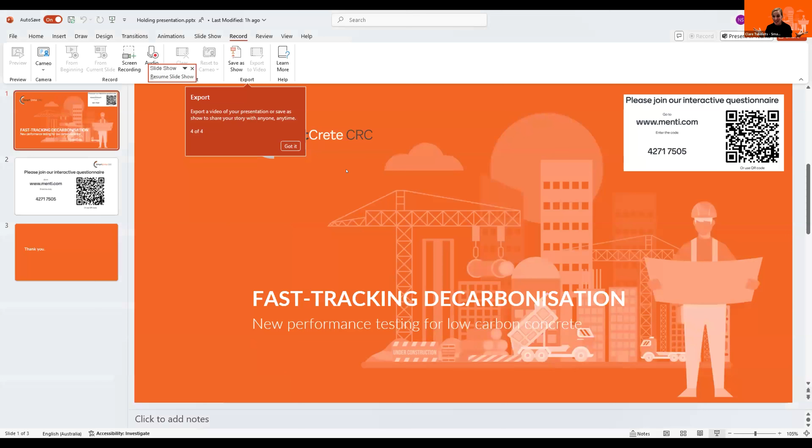Here we are popping everything up in the background. Thank you. Thanks for that, Natalie.

Very pleased to be working with the full concrete supply chain towards pathways to decarbonisation for this sector, leveraging collaboration, innovation, and some really fantastic sectoral engagement.

So today we wanted to have a conversation with you about pathways to new performance testing as a way to really enhance our ability to adopt new low carbon concrete products quickly, but also with a real understanding of the risk and the compliance and really get that real certainty about how these products work. So we've got a fabulous panel for you today to talk about various aspects of this question of performance testing.

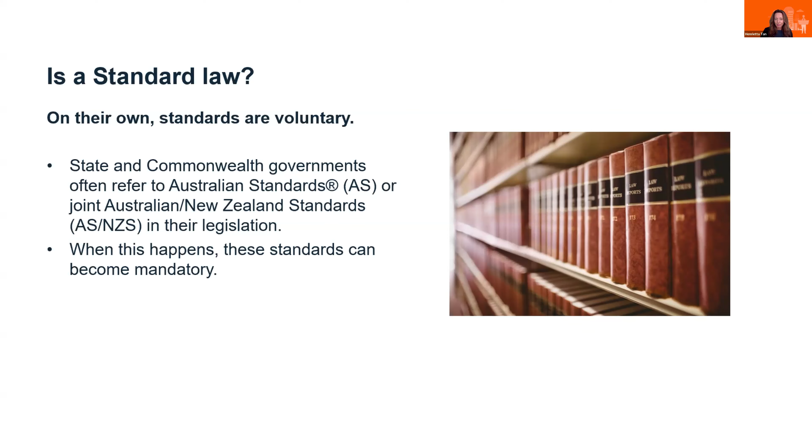I wanted to talk a bit about our proposal process and who can submit proposals to develop new standards or publications or revise them. The short answer is anybody can submit a proposal for new work. It doesn't matter where that comes from. If someone identifies that something needs to happen, then send us a proposal. So we're becoming more active, as you can imagine, particularly in sustainability, and we're really pushing in the decarbonisation space. And that's coming from the industry.

In terms of what we need to look at, we need to look at the problem statement. What are we trying to fix? What are we trying to do? We don't want to develop standards or other publications just for the fun of it. There must be a purpose behind it. And then we need to look at what's the scope of the work? What does that look like? And we'll look at as many of the specifics as we can before we start the work to iron out as many of the problems as we can before we get started.

We'll also look at who's going to do the work. Is it going to be our traditional technical committee? Is it going to be a lower consensus document for one of our speed to market solutions where we might just get individuals to work on that, or a small number of individuals?

And as I said, everything we do is about the net benefit for Australia. So it's also important for us to get support from a wide range of stakeholders. When we send out proposals for public consultation, we want to talk to as many people as possible, whether they think it's a great idea or whether they think it's a terrible idea. Is this going to affect the users adversely? Is this going to have a terrible impact on manufacturers, for example? Are people not going to be able to afford to implement these changes? So it's really important for us that we do actually have conversations with a number of our stakeholders and look at both sides of the coin.

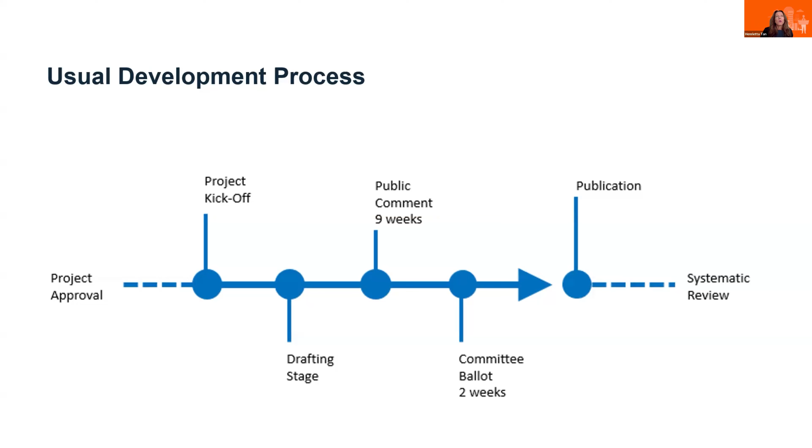But then we have our, dare I say, speed to market solutions. So as I said, anyone can drive the development of a standard, and we've got a number of pathways which aim to speed up some of these solutions. So handbooks and tech specs are a great pathway for getting documents out a bit faster than our traditional Australian standards. Our handbooks are what we call lower consensus, and that means it doesn't need to go through as rigorous a process as an Australian standard.

We've also introduced interim standards, which are much speedier than getting a full standard developed. But it's very important to note that these tend to be for projects where perhaps the idea isn't fully formed. Perhaps we haven't got total agreement on that work. It does allow the market to look at what work's been done in that space and provide their feedback. And the idea of interim standards is that one day that'll become a proper grown-up standard.

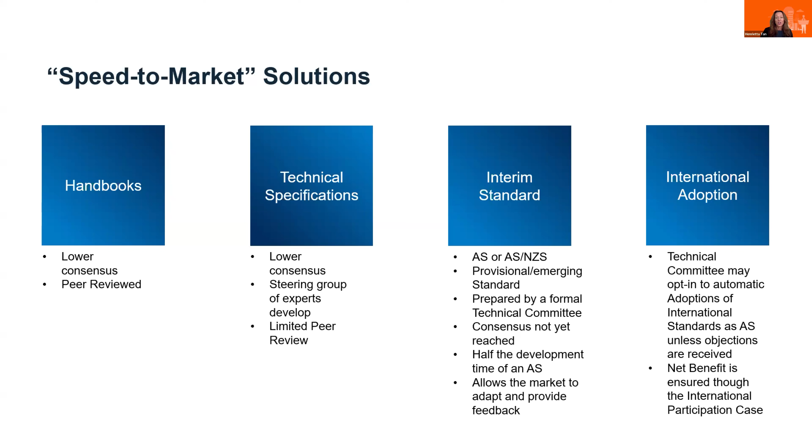We want to speed things up, and we've listened to feedback we've got over the last few years where we need to be faster, we need to be better. And particularly when we're playing, as I say, in this space around wanting to move across the decarbonisation journey, to make things more resilient, to make things more sustainable, we have to be more mindful about just being better and being fast out to market without removing the robustness of what makes our publications so important in the Australian community.

So just worth flagging some of the pieces we've got going on at the moment. They're all in various stages. So as I said, we had the fast track amendment. So that was published quickly for the correct interpretation for the intent of AS 3600 2018 and allowing the community to realise the benefit offered by 600 MPa steels, potentially improving sustainability and construction costs.

We've got the big ones, the AS 3972 general purpose and blended cements, where we're looking at the different types of low carbon cement types being used, and the use of different pozzolans. So that's a very important piece of work.

The AS 3600 concrete structures is also a massive piece of work. None of this is straightforward, but we're all moving along as quickly as we can. So that includes looking at potential inclusion of provisions for geopolymer and alkali activated binder concretes, sustainability, use of waste materials and review of the existing structures.

And then of course we've got AS 1316 masonry cement. Now this one's pending while we look at committee capacity, but this one's around reducing the clinker factor in masonry cements specified in 1316, and to look at the limitations on SCM content and type provided for masonry composite cements. That's all around clause 4.2.

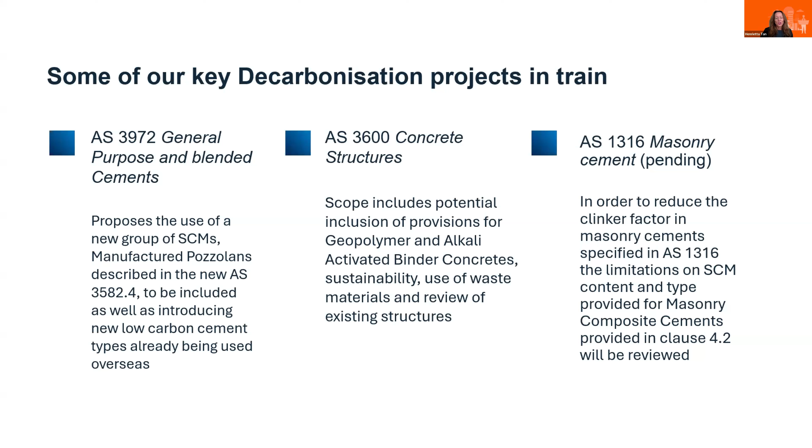As I say, without sacrificing the robustness of what we're doing, because at the end of the day, what we're doing is for the long haul in the Australian community and in the built environment, and we're just looking at the bigger picture. So that's my take on what we've been doing.

I think I have, I stopped sharing? No, there we go. Stop sharing. So hopefully I haven't gone over time. That's us in a nutshell.

Perfect. Thank you so much, Henry. That was a really great overview. I think it beautifully sets the scene in terms of how the evidence that we're creating through these performance tests is then actually used through that whole process of review, and then finally the publishing of standards. So yeah, really appreciate that overview.

Thank you. So we'll move on next to our next speaker to try to bring back those 12 minutes that we lost. I'm really pleased now to introduce Marjorie Valix, who I'm sure is known to many of you on the call. Marjorie is a professor in the School of Chemical and Biomolecular Engineering at the University of Sydney. We're also very pleased that she's leading a number of the projects within the SmartCrete CRC. She provides a lot of great technical expertise and professional advice around testing, research services, the community, government, industries. And so we really felt like she was such a fantastic person to help us have this conversation about the pathway to new performance testing.

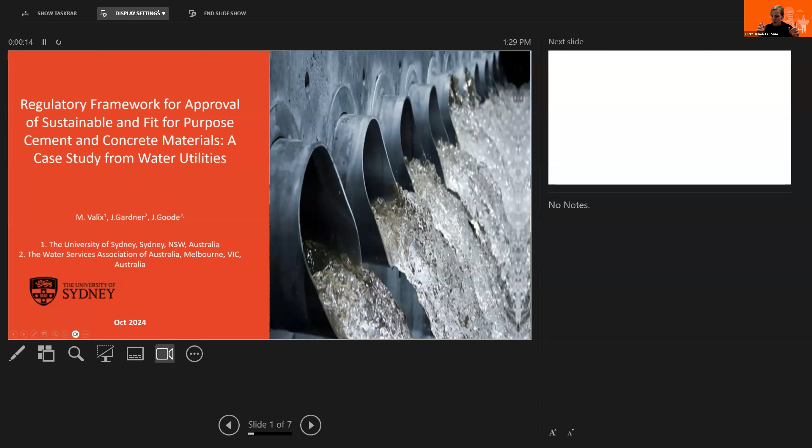Marjorie, before I quickly hand over to you, I can see your presenter screen, not the presentation itself, but over to you, and thanks for joining us. Is that better? Yes, perfect. Thank you. Great. Thanks, Claire.

I'd just like to talk to you a little bit about what we had been doing as a case study from the water utilities in terms of trying to develop a regulatory framework for approval of sustainable and fit-for-purpose cement or concrete materials. So I'd just like to also acknowledge James Gardner and James Goode from the Water Services Association of Australia, who've actually supported us in developing this framework.

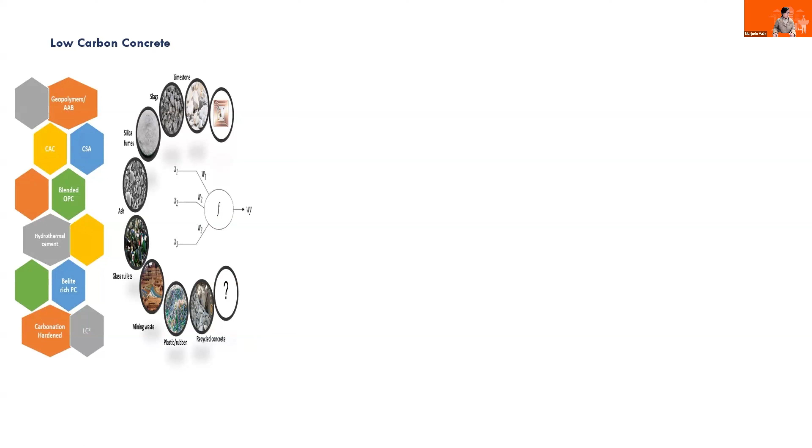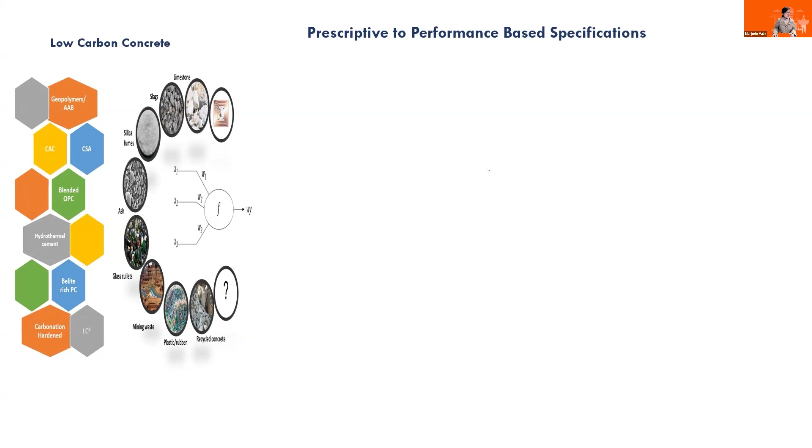The challenge for us, as we already know, is that a low carbon concrete is going to consist of alternative types of cementitious material, including geopolymers, calcium aluminate cement, and also blending OPC with various types of SCM materials, which may include a variety of different types of waste. So the challenge there is then how do we actually approve these materials for use, considering that we don't have much of the performance data associated with these materials. The work that we've been trying to do is really moving away from prescriptive to performance-based specification. So what's needed to actually develop this are various things.

One of the important aspects is the cross-industry collaboration across the value chain. That means taking all the way from the people who actually manufacture the cement and concrete, all the way to the end users, to the applicators, to the pipe manufacturers. And that's really needed because you need to have this knowledge sharing and also to take the risk, and as much as possible to have everyone who's going to be involved in the process sitting at the same table to internalize the risk, so to speak.

The other aspect is trying to define the unique performance that is actually required for this material. And I think this is going to be very specific for the different industries. In particular, I'd like to take this opportunity to show what the requirements are, for example, for the water utilities in their application in sewer and also water. And the other aspect, of course, is the importance of R&D, which is obviously what universities do, essentially trying to tailor low carbon solutions that need to meet the requirements of the industry. The other aspect that's really important is validation. Validation is very important to ensure that the actual performance is achieved. And then finally, of course, is the regulatory framework to make sure that we can actually implement this.

Now, an important aspect of developing a performance-based specification is not only about making sure that it actually performs. The other aspect that is also important is to ensure that we can also capture the embodied carbon, because here we are really trying to develop not just a cementitious material that will perform, but we also need to make sure that it meets the embodied carbon requirements that we're trying to reduce, and also the cost issues.

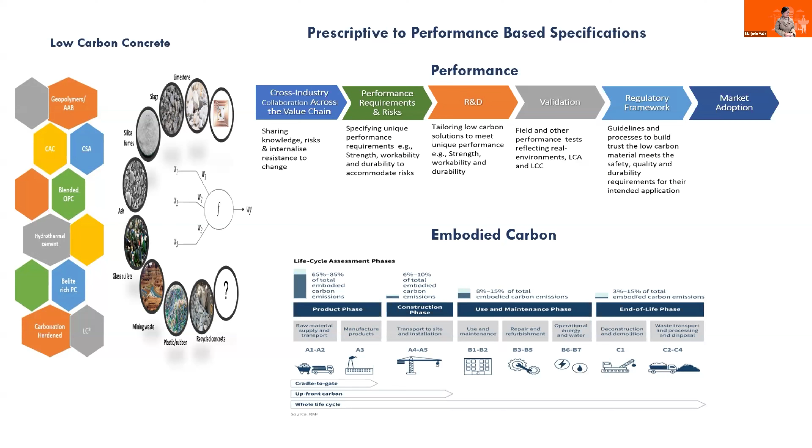We need to recognize the embodied carbon is not just in the material itself, but it also involves the construction of the materials and the subsequent repair and eventually the end of life of that material, how we're actually going to deal with it.

So with that in mind, I'd like to showcase the previous work that we've done, which is funded by the Cooperative Research Center project. And it was titled the Smart Linings for Pipes and Related Infrastructure. Okay, so we did a lot of things here, but one of the important things that we needed to develop is the regulatory framework for approving the materials that would eventually be used for protecting these particular assets.

So we were working really with a series of cementitious materials, all the way from alkali activated materials or geopolymers, all the way to calcium aluminate cement. So the question was, with this range of different types of cementitious material, how do we determine which is suitable, and how do we determine how to select the one that would be appropriate for the application?

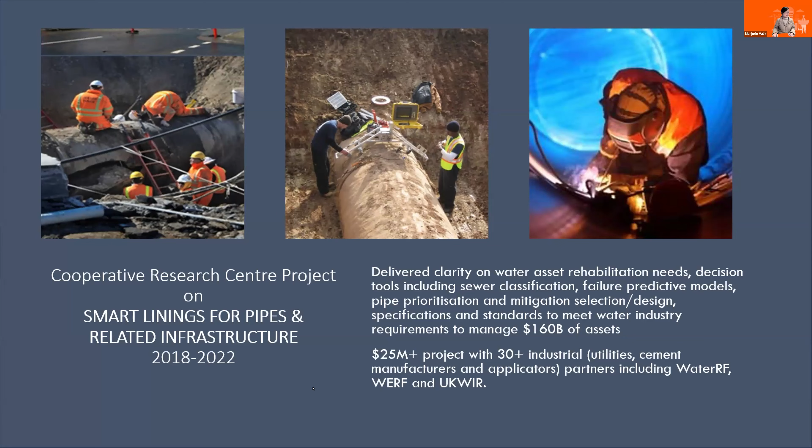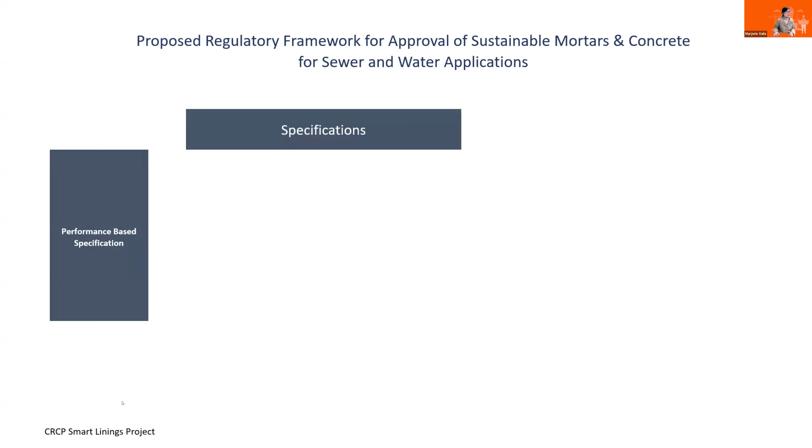So this is essentially the proposed regulatory framework that we've come up with. In terms of the performance-based specification, we think of it as a process where it's really a specification and also the validation aspect. What we've developed there are a series of product specifications, again, referring to the different types of cement materials, very similar, I guess, to prescriptive, but also specifying the requirements that need to be met, including, of course, the codes of practice and the classification of the corrosion risks under which each of these materials are going to be applied.

And that's quite different from how we have specified cement or concrete materials for, say, pipe manufacture in this space, in that we're actually moving away from simply considering the corrosion risks, for example, in sewers, as being highly aggressive, and trying to divide that according to the actual different risk factors. And what that delivered are things like the performance requirements, including test methods and acceptance criteria that would suit this particular corrosion risk.

There's also obviously qualifications and certification for the production facilities and personnel, which we didn't really work with, but we know that it is also part of that specification. So how do we know it works? Well, part of it obviously is validation. Typically the best way to validate is just test it in the field. Often it would be a long-term process, also very expensive. But again, just making sure that it actually reflects the classified corrosion risk.

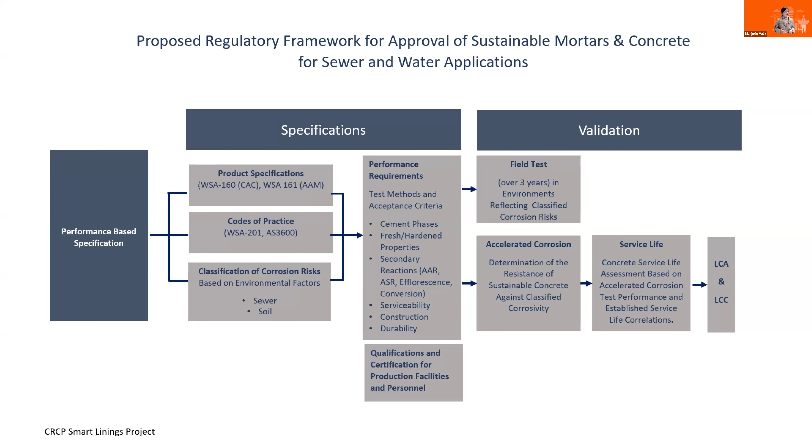The other aspect that we are now in the process of developing and getting approved is the series of accelerated corrosion resistance tests that determine the suitability of the cement or concrete materials against the classified corrosivity. As part of that, we aim to also establish the service life of those materials against those classified corrosivities. And finally, to also include the LCA and LCC, because if we are going to work with low carbon material, we need to make sure that we are delivering a low carbon material, but also understand, for example, the life cycle costs associated with the use of that material.

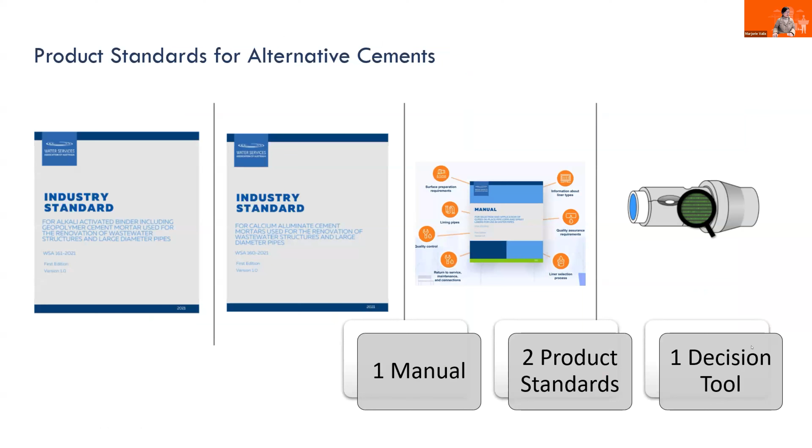So essentially, as part of this program, we've developed two standards, one for alkali activated materials and geopolymers and one for calcium aluminate cement, the codes of practice, and also a decision tool. Now, I'd like to highlight a couple of things that were important in developing this performance-based specification. One is the classification of the corrosion risk. To ensure that we have a fit-for-purpose concrete solution, we really needed to understand the relative risks of corrosion introduced by the different environmental factors, in this particular case, the sewers.

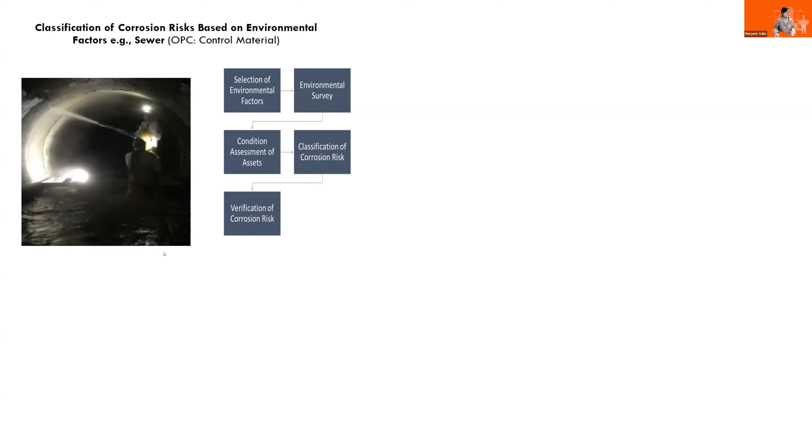So in order to do this, we first selected the environmental factors that we know contribute to the corrosion. We then did a series of environmental surveys, followed by condition assessments of the assets where these environmental factors are present, then the classification of the corrosion risk, and then the verification of the corrosion risk itself. And what we have developed is, this is a simplified version of the different classification risks associated with the different environmental conditions, and also the actual impact on the corrosion of a normal OPC.

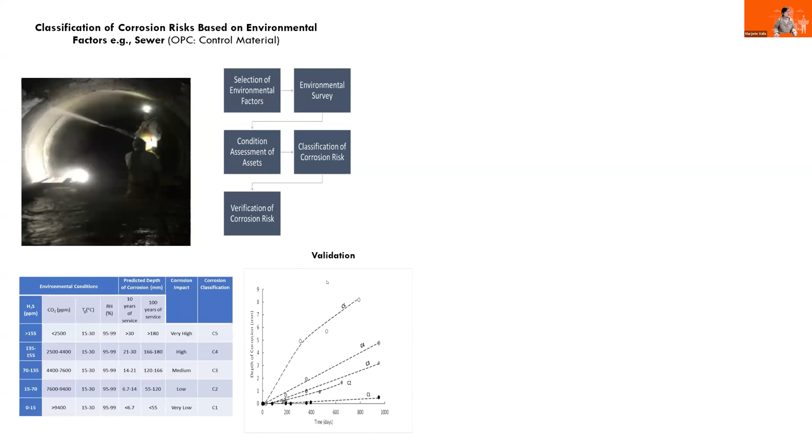And to validate that, what we've done is we then installed a series of alternative cementitious material in this environment, and then we also measured the relative corrosion. And this is an example of one material that we have installed. And so we could see here that we do have different levels of corrosivity or corrosion rates depending on the different aggressiveness, C1 being the least aggressive and C5 being the most aggressive. And essentially that validates that the classification that we've developed for OPC also works for other types of cementitious material.

So on the basis of that classification, what we have then done is try to propose a series of ways of validating the corrosivity of the different mortars. So this is a series of accelerated corrosion tests that essentially mimics the corrosion risk that is available in sewer. So the scope of this test essentially is to assess the durability of the different cementitious material as a function of those environmental conditions that could either be as a result of MICC and also soil corrosivity.

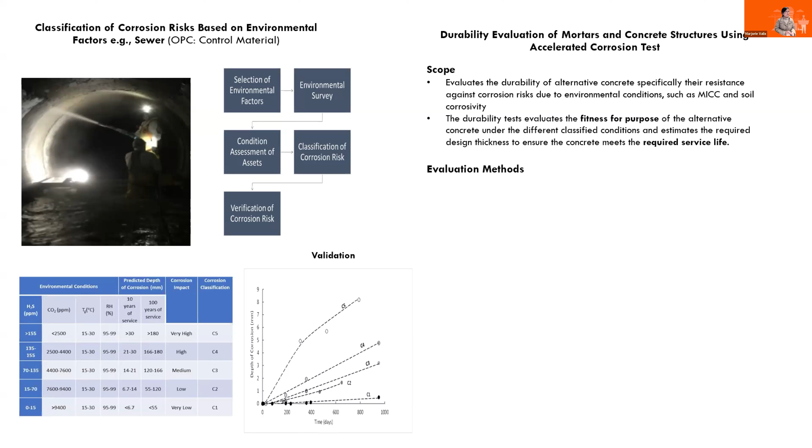The other aspect is that we do want to determine whether the materials themselves are fit for purpose. That means they will survive that environment, but also we wanted to understand the required service life of that material if it was actually applied in that environment. So the evaluation method itself involves essentially subjecting the materials to a series of accelerated corrosion tests that mimics the classification risk conditions.

And then the acceptance criteria for the material is established essentially by comparing the corrosion results for that material against the performance of OPC under a similar accelerated corrosion test, and then calibrating that against the OPC's established long-term performance in the same real environmental condition. Now, because we have lots of data on OPC that has been subjected over the years from, for example, 17 to, let's say, 80 years, we're able to use that to benchmark the behavior of alternative cementitious material compared to OPC, and we therefore use that to evaluate the acceptance of that material.

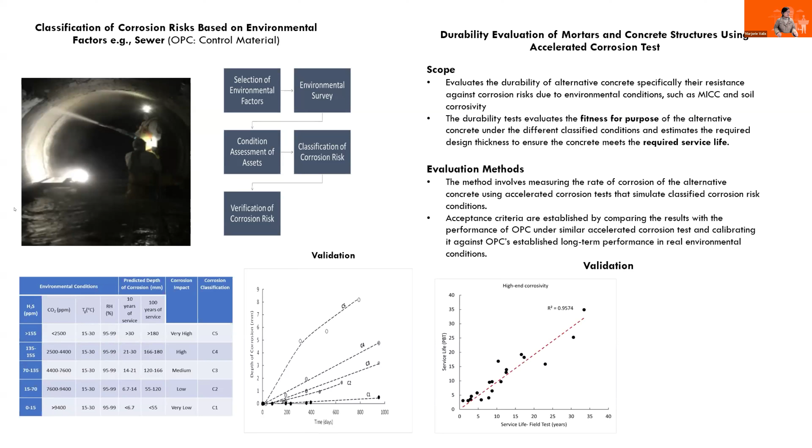So in terms of validation, it shows you, for example, a high-end corrosivity test where we compare the service life of a particular asset or material to the service life we would predict using this accelerated corrosion test. This represents, by the way, different types of cementitious materials, OPCs and different alternative concrete, so I haven't tried to distinguish one from the other. And then this one is more a low corrosivity comparison. So we could see that it's not a perfect fit, but we do have a reasonable fit that shows us that at least the trends are going the right direction.

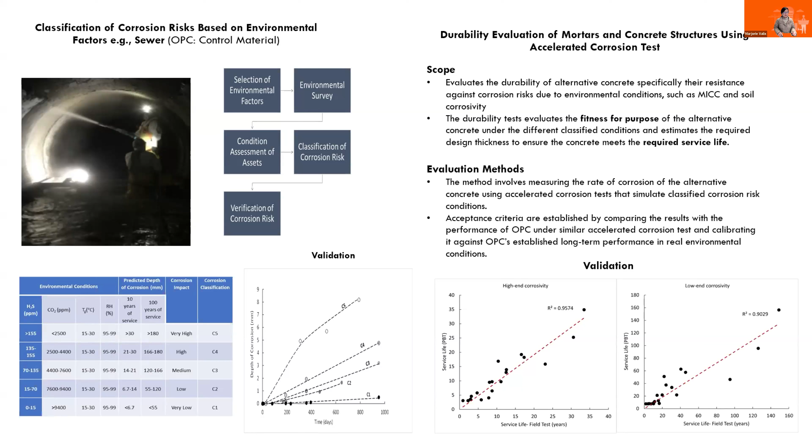Okay, so question is, what's next? So obviously a lot of this work that we've done before is based really on cementitious materials and mortars. And so the next phase is a project that we're undertaking as part of the CRC SmartCrete, which we call Fit for Purpose Concrete. So this is a 4-year project which will examine various types of low carbon cementitious material, also augmented with waste, to try and use it for construction. So the test case will be using it to manufacture access chambers, pavements, and roads, and also as part of cement mine backfill.

And what we're doing is we're partnering again with a range of industries which we know will have involvement in the whole value chain. And the idea again is to ensure that we capture the knowledge sharing, understand the particular risk and concern, and also make sure that we have an early adoption of the products themselves by including the end users, such as the water utilities, the transport and roads industries, and also the mining industries. Okay, thank you.

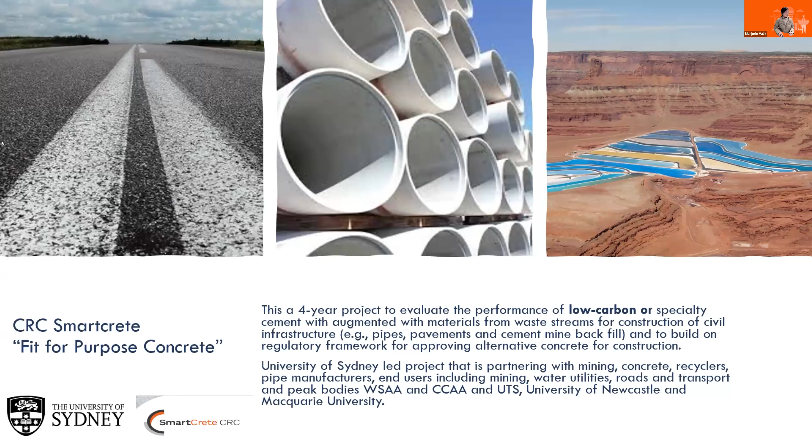Thanks so much for that, Marjorie. It's so fabulous to see that direct example of the development work that you're doing in terms of new performance testing, and then to be able to see how that's being published and shared and promoted in terms of that adoption. So yeah, really pleased to see that, and the work that you're doing in the water industry there. It was fabulous. So our last speaker today is Josh Tapas.

Josh is a materials engineer at GHD, but again, probably well known to many of you on the line. She is also the president of the CIA Next Gen community, so very well known across the concrete sector. She's an experienced materials engineer with experience across material characterization equipment and proficiency in cement and cementitious materials. Josh has very recently finished her PhD working with SmartCrete's very own Professor Vute Sirivivatnanon, and she was focused on alkali silica reaction and major durability issues in Australia. So Josh, thank you so much for joining us today. Happy to. Let me just share my screen.

Is that? Perfect. Does that work? No? Yep, we've got it. Thank you. Is it on a slideshow or? Yep, you're in presentation mode. We can see it. Okay. Great. Thanks, Josh. Okay.

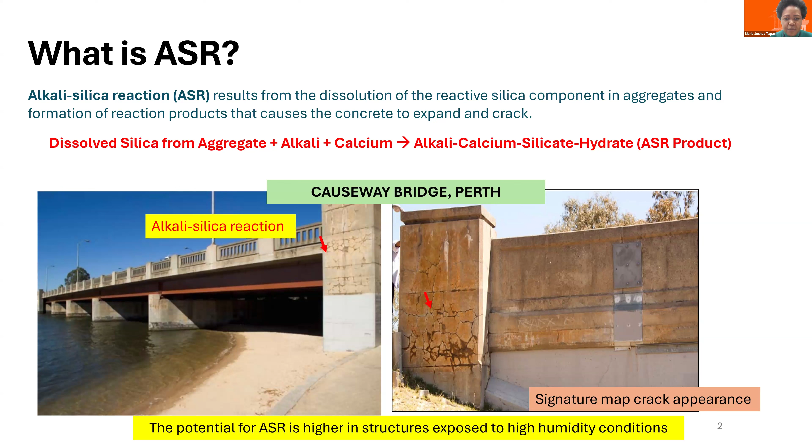Now, this ASR product, once it accumulates, tends to result in concrete cracking. Once concrete cracks, it becomes prone to other deterioration mechanisms as well. ASR preferentially happens in locations very close to water, and therefore susceptible structures are bridges, dams, as well as marine structures. Since ASR is primarily caused by the use of reactive aggregate, the best way to avoid having to deal with ASR in the future is to avoid using reactive aggregate. Then how do we test the susceptibility of the aggregate to alkali silica reaction?

So ASR damage can manifest decades after a structure is built, 20 years or more, right? But we don't have that long to wait. So we have to know before we use the aggregate whether it has a potential for alkali silica reaction. Therefore, we use accelerated test methods to assess the susceptibility of aggregate to alkali silica reaction. As you can see on the screen, we have two in Australia, the accelerated mortar bar test and the concrete prism test.

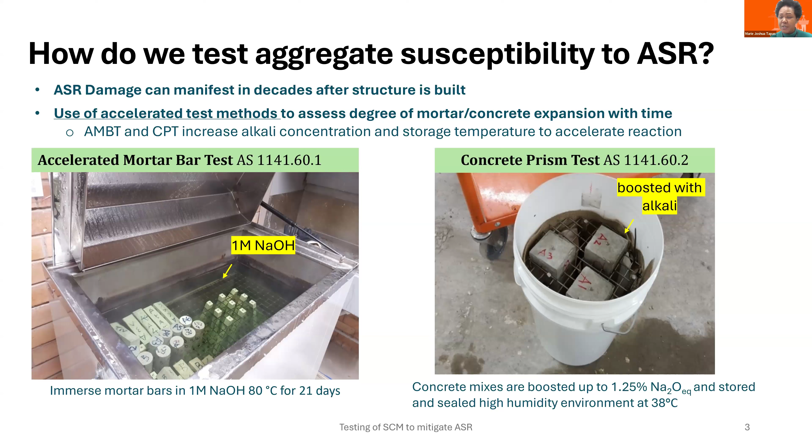Basically, both test methods rely on increasing alkali concentration as well as storage temperature to accelerate the reaction. And then we plot the expansion of the system with respect to time to assess whether we have a reactive aggregate or not. Right? So ideally, we don't use a reactive aggregate, but in cases where we don't have the luxury and we still have to use them in the concrete mix, what do we do then to mitigate?

Now, mitigation of alkali silica reaction involves the use of supplementary cementitious materials. This has been known for a very long time. The question then is, how much SCM do we actually need to mitigate alkali silica reaction? With conventional SCMs, fly ash and slag, which have been around for several decades, we know that we need about 25% fly ash or roughly over 50% slag to mitigate alkali silica reaction. The more reactive the aggregate, though, the higher the dosage of SCM required. And therefore, we still have to test to be sure of the dosage required.

But we already have a lot of documented cases, over 50 years or so, of structures that survive well even with reactive aggregates when we have SCMs in place to mitigate. Now, the plot you see is sample accelerated mortar bar test expansion data. It tests up to 21 days. You can see with increasing levels of SCM in the system, you get a decrease in the expansion. That equates to mitigation, which means SCMs are working well.

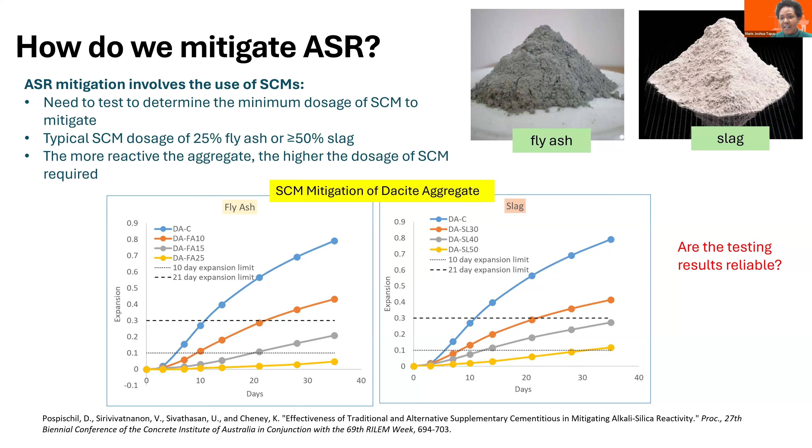You can also see here very clearly that not all SCMs are the same in mitigation. Slag, for example, would require more than fly ash, okay, which is actually good for our low carbon concrete initiative in any case. But the bottom line is not all SCMs are the same. Okay, now the next question perhaps is, how are we sure that the testing results are reliable?

Again, I think Professor Marjorie has already mentioned this in her presentation. The only way, the best way, is really to do a long-term performance test, okay, field data. When we're using accelerated test methods, say you're having a 21-day test result, and you're guaranteeing that your structure will not suffer from ASR for the next 50 years, if your design life is 50 years, for example. Bridges, if you're talking about 100 years.

And basically what you're saying is that, oh, I can test my concrete, my mortar in 21 days, and I guarantee you there's going to be no problem. So the accelerated testing methods really do not mean much without correlation to long-term data. So this paper was published about 2 years ago, where we looked at long-term data over 20 years, actually now over 30 years already from recent updates. Long-term data of ASR concrete samples in the UK and in Canada.

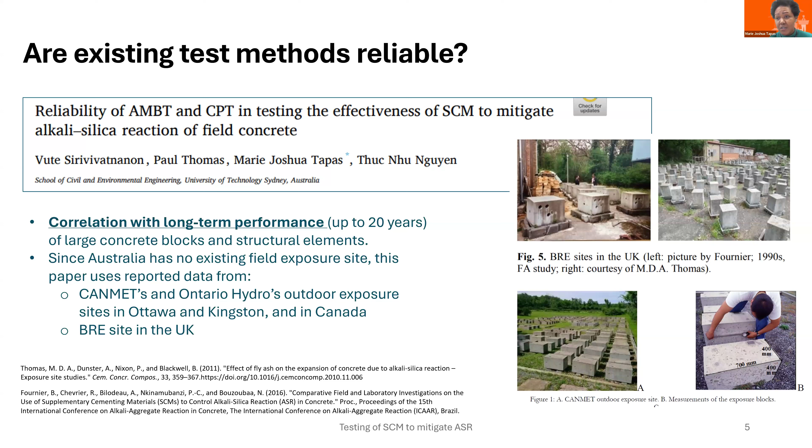Unfortunately, we don't have a field exposure site in Australia. And probably that's because we don't have as bad a case here as what we have in other parts of the world. But nevertheless, this data is very valuable and the only data we could actually use to benchmark. And what we found is that the accelerated test methods actually have very, very good correlation with long-term performance data.

In fact, the Australian test methods with their current test limits are conservative in comparison to the American counterparts. So the Australian test methods are basically exactly the same as international equivalents, except we have much more conservative test limits. And what we found is ours even correlate better. And in fact, AMBT, although heavily criticized as a very aggressive test method, works better in terms of determining the dosage required for long-term mitigation of alkali silica reaction.

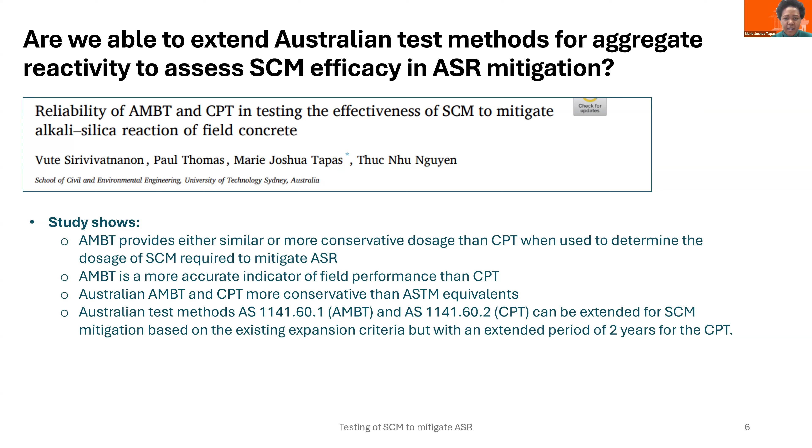I guess now the question then becomes, to me, there's no question we should be able to extend the test methods for aggregate reactivity to assessing the efficacy of SCM mitigation in ASR. Worth mentioning as well, because I'm talking about testing of SCMs, but actually we don't have a dedicated standard at the moment. We use the standard for aggregate susceptibility. So that's in process. I think it has undergone several reviews in the last few years. Hopefully it should get approved soon. So that paper was actually written to support the extension of the existing test methods for SCM mitigation.

So the next question then comes, would the test methods work to test other types of low carbon binders? I think we've already come a long way forward. The new generation of SCMs is, I think, inevitable, because moving to the low carbon space, net zero by 2050, we know that the SCMs we're using, fly ash and slag, are byproducts of industries that may not be present or with processing that may change in the future. Slag comes from steel. We're moving towards green steel. We may not have access to the same slag chemistry in the future.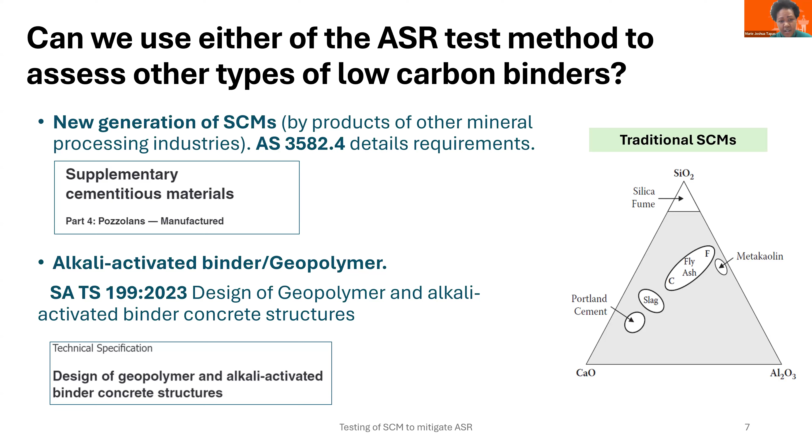Now, geopolymers have a very, very complex chemistry. Definitely, this is a very good move towards performance-based specifications, because with geopolymers you can make different SCM combinations, different types of activators, different alkali concentrations, so it's almost impossible to capture it in a prescriptive form of a standard. So I think we've made a good move on this one.

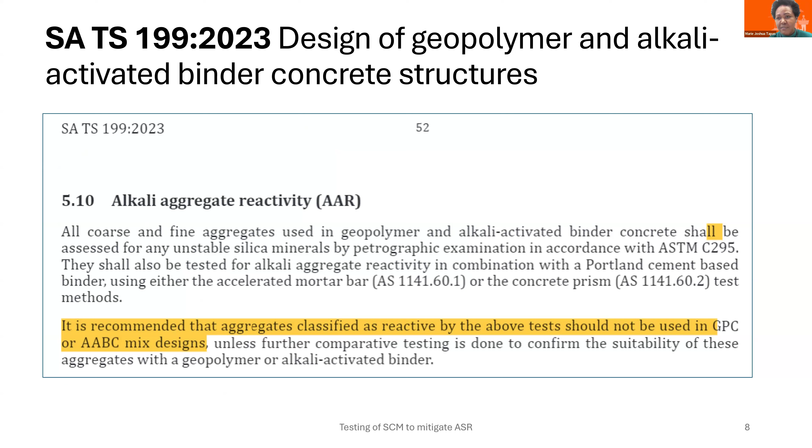Looking at this particular standard on ASR, like any other guideline, if you can avoid using a reactive aggregate, don't use one. If you have to, it defers back to the accelerated mortar bar test. The criteria are a little bit vague, but it provides an opportunity to use reactive aggregates in combination with alkali-activated binders, provided that the expansion is less than an OPC with a non-reactive aggregate, which means your system should have no expansion at all to be considered acceptable. So I think there's potential in there, but it would have to be clarified in terms of expansion limits.

For alkali-activated binders, I think more studies are still required, particularly for other durability deterioration mechanisms and other durability concerns. But this work by Austroads is probably the most comprehensive I've seen in terms of alkali silica reaction. If you go through this publication, they've investigated several chemistries of alkali-activated binder systems. And overall, they still demonstrate better resistance to ASR than typical cement. Fly ash-based geopolymers have better resistance than slag.

Not surprising, because basically with very high levels of alkali, you're almost pushing the required silicate in the system to a higher level to be able to mitigate. In fact, if you look at the plot on the right, if your slag geopolymer is about 100%, no fly ash at all, it cannot mitigate ASR with this particular level of alkali, the 6% sodium oxide equivalent, about 10 times what you have in your cement. Again, the resistance of alkali-activated binders depends on the binder chemistry and the concentration of the alkali activator.

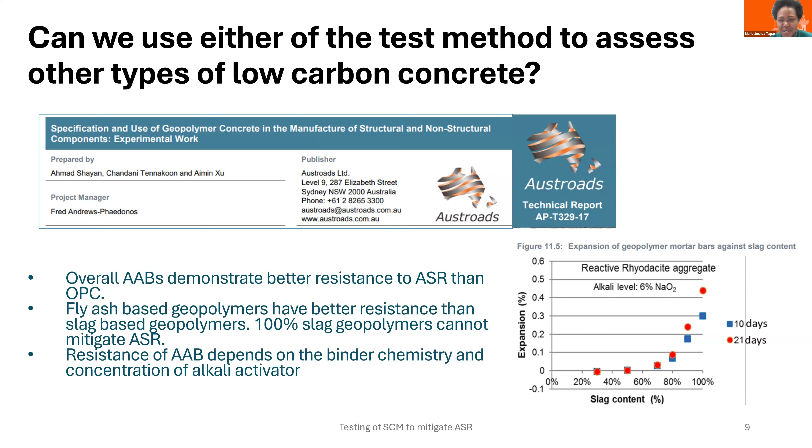So, conscious of the time, I have to go a little bit fast, but in conclusion, the test methods for assessing aggregate reactivity can be extended for assessing SCM efficacy in ASR mitigation, based on the paper we published 2 years ago looking at long-term field data from the UK and from Canada, where our Australian standards and test limits are even more conservative and proved to be very well correlated to the long-term data. AMBT is a quicker method, 21 days, and even provides a better way to assess the required dosage, even a more conservative dosage for SCM mitigation.

Is there potential to use the test methods for assessing the new generation of SCMs and alkali-activated binder systems? I think certainly there's potential to do that, at the bare minimum for a comparative assessment. Of course, the test limits will probably need a little bit more work. And again, long-term performance data will increase the confidence in these expansion limits. I think it's critical that we understand the test methods to be able to decide. That goes for any other accelerated test methods that we'd like to apply for assessing the new generation of low-carbon concrete.

Last is that not all SCMs are equal. Therefore, we need an understanding of the SCM chemistry, the pore solution chemistry, and how the SCM impacts that, because ASR in particular is very dependent on the pore solution chemistry. And the reason SCMs mitigate well is because they drop the alkali in the pore solution over time. It's also very critical to understand, as I've mentioned, the principles behind each testing methodology, because if you don't understand the test, you cannot just extend it.

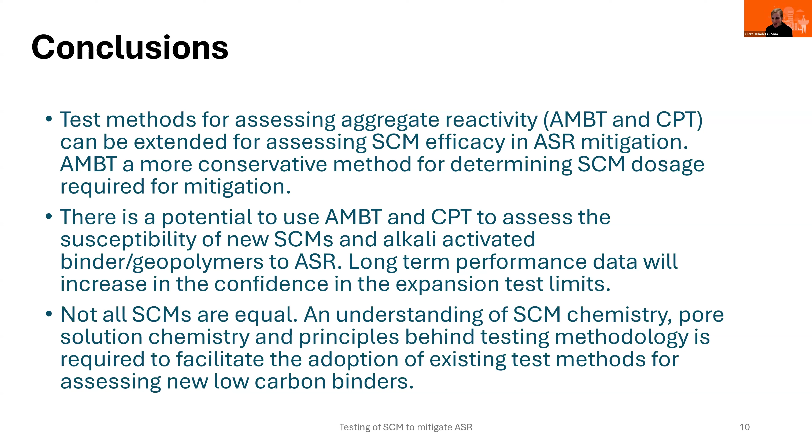Thanks so much, Josh. That was fantastic. What a great overview. And so wonderful to see the fruit of your labour within your studies really being demonstrated there, and some pathways towards new performance testing, which is great. It's also lovely to see that we've got such global engagement and the fact that you're able to work with places like the exposure sites in Canada to really help validate what we're finding here in Australia as well.